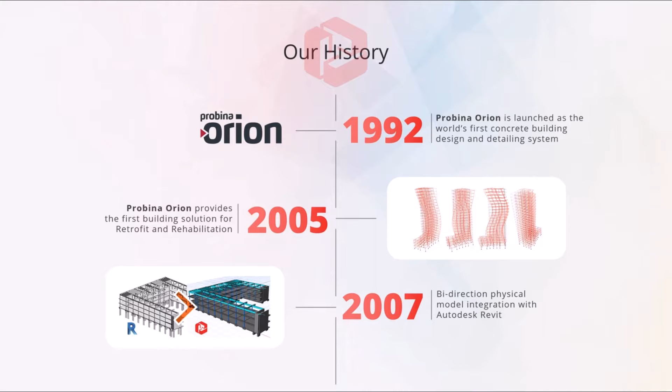We redeveloped the platform in 2014, and this is where ProtaStructure was born, and it's evolved tremendously over the 10 years since, and you're going to see a continued evolution in this presentation today.

Not to be outdone, we also have a very successful engineering team that's based in Istanbul, and they've been involved in some world's firsts. The largest international airport in the world was delivered in ProtaStructure using the technologies that were developed, together with a lot of the high-end seismic capabilities we have in the platform as well.

And as I mentioned, we're growing globally, so we're almost at 100 countries around the world. Almost, not quite—we just need a few more sales in some new countries, and we'll crack the 100.

So now, to do this, we invest significant time in the development of the platform, and that covers language support, detailed technical guides, a range of different international codes, and we also have a partner network that we support in delivering the technology locally to countries all over the world.

And we have a fantastic growing user base. It's really great to see the interaction that we get with our client base.

Now, what's the philosophy behind what we're doing? I think this is very important, just so you understand how we differentiate ourselves from others and what's important to us as a business. So obviously we look at what engineers are doing in practice and the type of solutions that they're using.

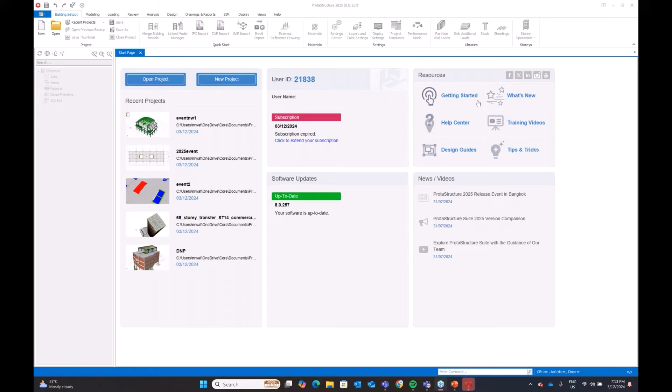Now I'm going to create a new project, and we're going to call this event 2025 NW. You'll notice there are a lot of templates here, you can grab a template, and these are customized to suit local requirements for the chosen code of practice. So if I choose, for example, a Eurocode template, it will load the local settings for that country. We've covered a range of different countries all over the world, whether you're in the US, the UK, my part of the world - Singapore, Malaysia, Thailand, or over in South America. We've customized the software to suit your specific local requirements, including language as well as local design and detailing practice. So if you're in India, for example, it will load the local Indian codes, all the local material databases, and the local way of design and detailing will be performed. This just saves you a lot of time with having to set this up.

So I'm going to design something today to Eurocode, and I'm just going to choose this. This won't affect the way in which you generally model in the software, that's all rather standardized. But I'm just moving straight into the modeling environment here.

So here you can see we've got a grid, and across the left we have our tree. This has evolved, so if you're an existing user you'll see we've added a few extra settings in here, things like sheetings and studs for composite and so on is all new. You'll see this ribbon's evolving as we develop it further.

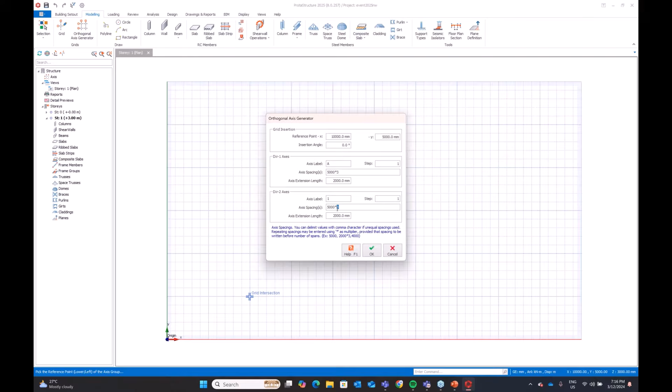Now, for the purposes of this presentation today, I'm going to create a simple model. I'm going to come in and draw out some axes, and create a fairly regular grid here. With this grid, I can take advantage of things like offset axes and so on to create extra intermediate grids. So I'll key in a grid line, take this grid and cut it down. We can do things like stretch the axes, so if you want to bring an axis in a little bit - maybe the bottom one here - I just want to stretch that up to a position.

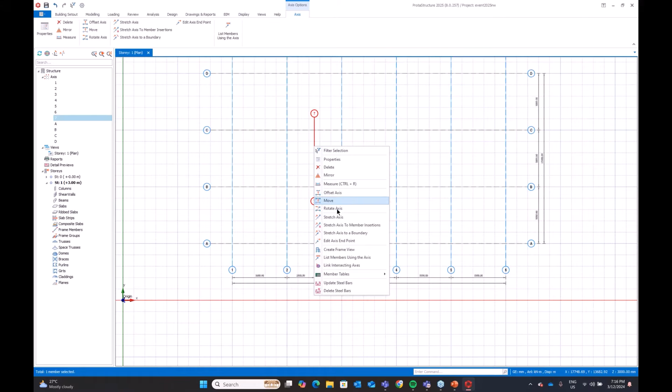Okay, maybe I'll just tidy that up a little bit at the top there. I like it to look good. Okay. Now these grids are all customizable, so if you don't want to see grids or you want to hide them, you can. They don't need to be present in the model, so I've just hidden that axis.

I can also take these grids and I can offset them. So if I wanted to create another grid, say 10 meters away, I can just type that in and I can create that. Now you can use the grids to help you with set out, so a little bit like sketch lines. And again, I can hide these and I can just use the grids as I'm doing here, just to sketch out positions that I may want to model to.

Okay, these can easily be done here. So I'm just here. You can see I'm taking advantage of the grid, the background grid as well with that set out. Okay. Now at this point, I'm going to use those to actually create some walls. So I'm going to use this to just model and create a core wall. So I'm just putting the properties in here, and you can see I'm just running around and setting out a core wall. Okay, and I'm using those axes just to help me define that.

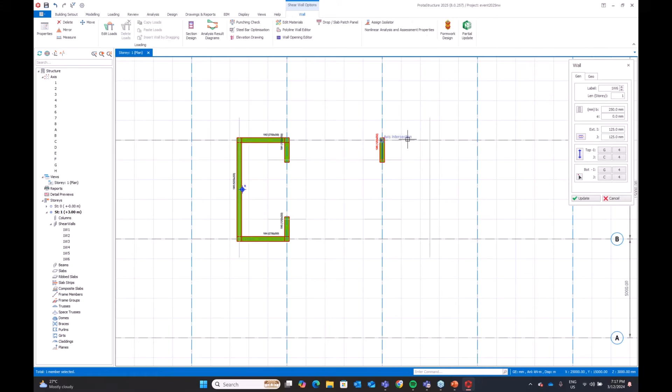So I'm putting a wall in at this location and just running around and setting that up as I'm doing here. Okay, so you can see that I've created a C sort of a channel shape core wall. You can have any type of core wall shape you like in here that can easily be defined.

The next thing I'd like to set up is some columns. So I'm just going to put in a regular arrangement of columns. Let's call these 450 square. Okay, we can box around to put them in quickly, and define them as I've done here. I'm just going to run around, create these around the periphery, and we can come and set those up.

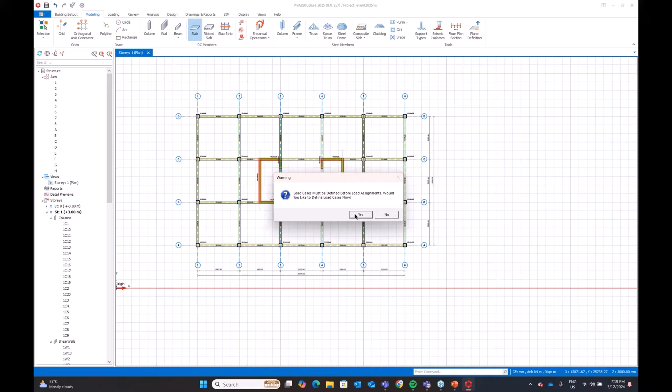Next step might be to provide some beams, and I'm just going to define and set up some RC beams. You can just give them some properties here. Now these can be quickly defined. If you have a regular arrangement, you can just box around and with a click create everything in one shot. Okay, now at this point, before we get into creating slabs, it will ask us to define our load combinations.

So we have a new load combination generator in the 2025 version, and it can guide you through the preparation of standard combinations in here. I can set up my dead and live load cases. I can set up a few permutations with things like pattern loading, stage construction, thermal cases, lateral cases like seismic can be set up here. You can, if you wish, model vertical seismic. This is something new that we've added.

Wind loading can be set up. You can assign notional loads to that, or you can leave it. You can generate separate combinations for steel as well as concrete. You can also add geometric imperfections for this. Maybe on the job you've also got a basement, you want to assign soil pressures. All these types of things can be easily defined and done in the model.

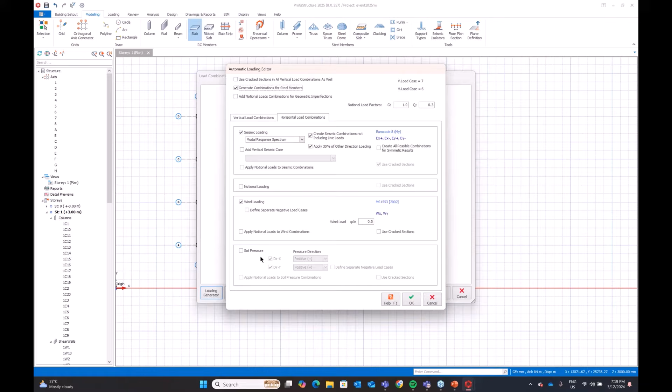Okay, so if I just accept that, you can see it's generated all these cases. Now you can add other load cases to this, so it's fully flexible. If you wanted to add a crane beam case or something like that, it's easy to come in here and set this up. So here I've got my concrete, my steel cases. We have also newly separated out the serviceability cases here. So you can have different serviceability checks for steel as well as concrete here. Okay, if you're happy with that, then you can accept this.

I'm now going to come in and define my slab. Now you can key in a thickness. Okay, I'm going to define some dead and live load. If you're not sure, there's tables here that you can refer to quickly establish them. So if it was say 2, for example. Now, if I click on the insert slabs automatically command, it will just place all those slabs automatically into that defined area. So they've just been quickly set up, and I'm just going to remove the slabs at the core walls there to make that clear and easy.

So what I've done at this stage is just create that first story level here. Okay, and you can visualize this. At the moment I've been working in plan, but what I've actually been doing is creating a 3D physical model, and you can see the beginning of the model that I'm about to build. Okay, so we can tile these, and you can quickly come and set these up.

Now what I'd like to do today is I'm going to work with some different structural systems from what we might typically work with. So I'm going to come and insert some stories. So let's assume that this building is 4 stories high.

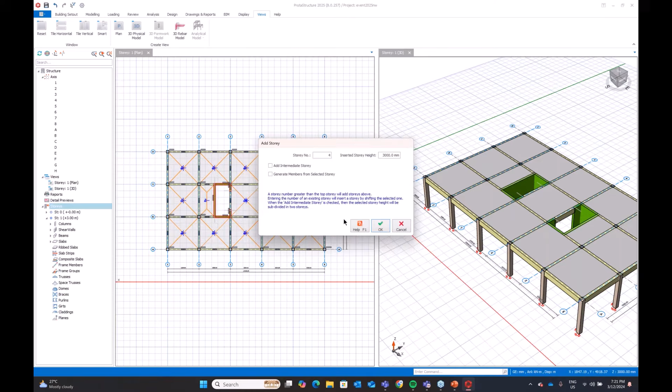And I'm going to take that first story and I'm going to generate some information up. Okay, so I'm going to take the first story and I'm going to copy it to the second, but I'm going to remove the beams. I don't want the beams at the second floor level there. In fact, what I want to do is adopt this as a flat slab. Okay, so if I hit OK, you'll see that we've now generated that up.

You'll notice that the slabs look like the beams are missing there. Okay, that can easily be resolved. So if we just hit move members to axes, okay, that will then remove those. And you can see that that's just regenerated as a flat panel. Okay, so we can come in here and establish this kind of arrangement.

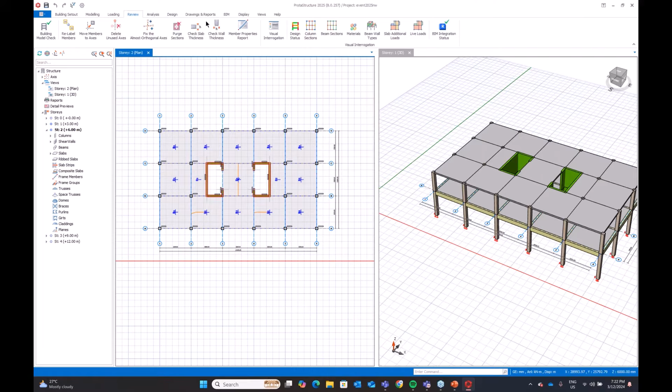What I'd also like to do is I'm going to just focus on the plan view for the time being. So let me just move into that. What I'm going to do at this point is come in and define another slab. Now I've put the slab in at this point as 200. I'm just going to quickly change this. Let's assume that the slab is going to be 250 thick.

Now, to do this, anytime in the software, you can select the elements, you can go down to slab table, you can easily come and define and make changes in here. So if I want to just quickly change the slab, a bit like in a tabular format, I can quickly change, and this could be other things, loadings and so on. Easily you can come in and make changes. So I've increased the thickness here to 250.

I'm also going to want to create another type of slab. I'm going to assume that I've got a cantilever to it. Okay, I can define the thickness again. Loading again, we can just put this in. It'll be 1 and 2, but I've got a cantilever, so I'm going to assume that this is going to cantilever out a bit. And I also want to have a parapet load, so I could define a small parapet around the edge of that. It could be a balcony, railing, or something like this.

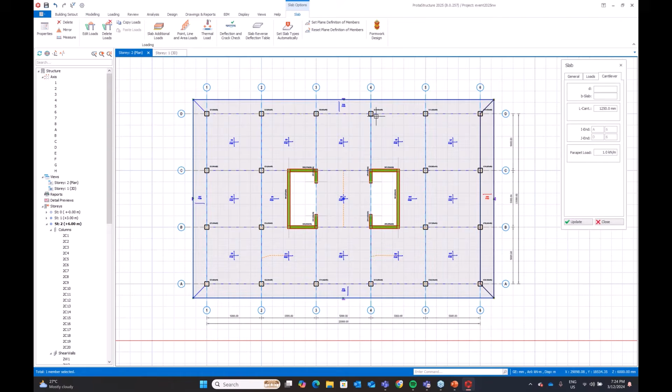Okay, and to define this, I can just click between margins. Notice how it's asking me which side I want the slab on, so I can just click and create that. Okay, so I'm just running around coding that at the edge there. Let's run around and put this one in as well. Okay, and finally this final side. You'll notice that it's joined at the corners there, to create this panel.

Similarly, if you select all the elements, you can just easily come and filter. So if I just filter the selection, maybe I just want to see the columns, and I'm just going to select the columns only, and you'll see that they've now been highlighted. Now at this point, I'm going to come into the column and I'm going to insert a new function here called drop or slab patch panel. Now when I select this, it will then allow me to define a drop head panel.

If I hit OK, you can see that straight away we've set those up, and they've been established in the model. You can do the same thickenings around the core wall. I won't do it for this example, but those can be done as well. So here you can see that I've set those drop head panels up.

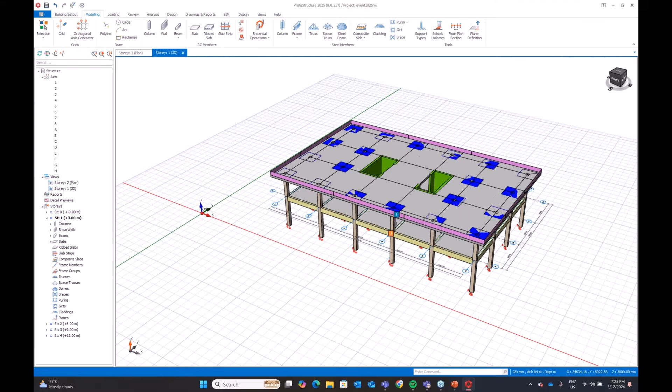Okay, together with the drop head panels, together with the patch zones. Okay. Now, if I just go back to the plan, what we would want to do with designing the slab is we want to set up strips to allow us to integrate across strip widths. And you can see here, I'm going to define some slab strips.

I'm going to choose the direction I want the strip in. I'm going to go for a finite element strip, and I'm going to use an integral strip. Now, I'm going to draw the results from the building analysis, but you could choose just to do a subframe analysis. It could just be a FE Floor analysis in here, and you can also define the width over which you want to integrate.

Okay, so I'm now going to define these strips, and I can just draw through the slab here. You can see that I'm just coming in and defining the zones over which I want to create these strips. You could just easily put these in, and you can define where you want these strips. So these are, I guess you'd call them mid-band strips. I can cut strips in the other direction as well. So if we just come up, I'm just creating them in the Y now, and we can just carry on and draw these through.

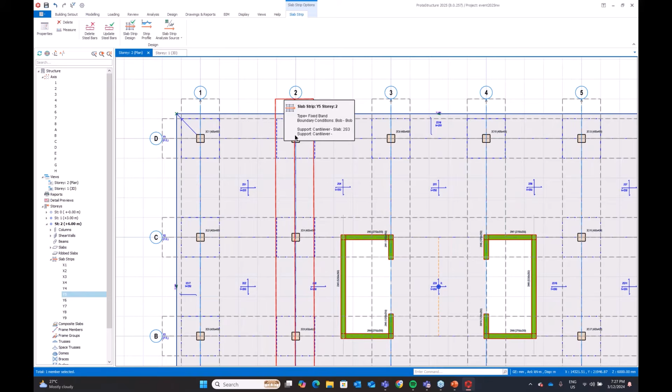Okay, another one there. Another one maybe here. And we can carry on and just draw these through. So when we run the analysis, we're going to mesh this floor, and it will then collect the forces along these zones for the design. So the patches we've created, and I think I've just made one that's not quite what I would like. I can just go back and reposition that. Let's just get that orthogonal.

What we're doing is that I have a strip here, and if I was looking along this strip, I've got a patch here, I've got a mid-band, I've got a patch, I've got a mid-band, I've got a patch again, I've got a small band, I've got a final patch. So we're going to cut a FE strip along this, it'll integrate along those strips, and then it will design the steel, it'll average across those widths and design the steel in those zones.

Okay, now you can set up other strips, intermediate strips as well. So if I wanted to define another strip, and it could be a strip along this mid-band zone, you can come and choose this, and you'll notice here that the width here is editable, so you can choose the width over which you want the strip to integrate. So I've extended that width across this width here.

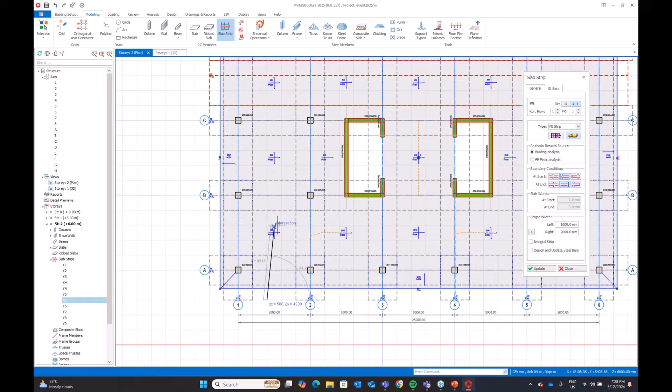And I could at the same time cut the same strip in the other direction. So let's assume that we are cutting a strip here as well. And I could carry on. I could break this all into strips for the whole slab. But I'm just going to give you an idea of how that's set up and how you can go about using this. And later on, it'll collect all those forces, and then it'll automatically design the slab for you.

Okay. Now, as part of this process, you may also want to just look at the loading, and the software will predefine different pattern load variations for the slab. So when I set up the pattern loading, you can see that it's defined a series of different permutations here. Now you can manipulate these if you wish. So if you didn't like this permutation, you could turn this panel on and off.

You can just come around and manipulate this to suit the different permutations that you would like to see. So if you wanted to have, I don't know, something like that, you can set up a checkerboard of different type of loading that you would want to see in the slab. So this can be up to you, and you can set up these different permutations. There can be really an infinite number of different permutations that you could establish here, but this will then cover the range of expected loading that you would expect on the flat slab.

So the pattern loading will then resolve it into envelopes that we will then use for design for the slab system. So this is a nice, easy way to see that visually. And of course, as I mentioned, you can work with this to manipulate it to suit what it is that you want to see. Okay, and you can create multiple different ones. You can add to these if you wish, and set up all these different cases. So it's a nice way to visualize that.

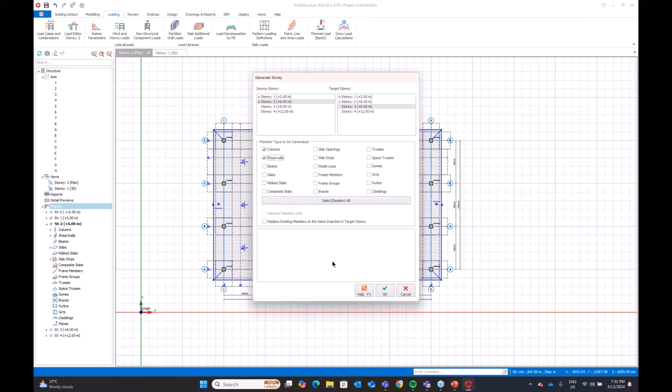When I do that, you'll notice that it's also taken the column heads. Again, I could just filter these out. Let's just quickly isolate those, and then if I come back in, I can turn off the drop head panels so they can just be removed. Okay, and I've just got my columns left. So if you look at this in 3D, you can see what I've done here. I've just extended those columns up.

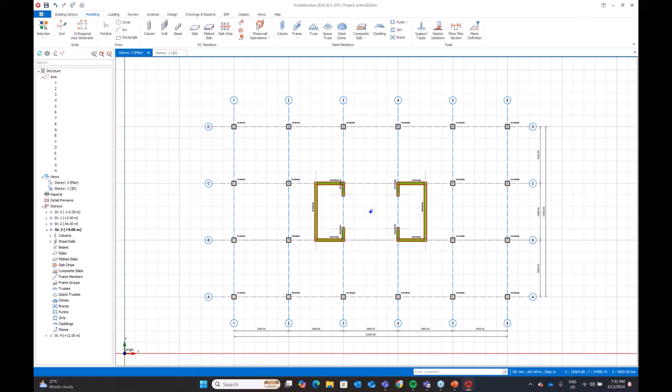If I go back to this plan, this time round I want to model something a little bit different. This time round I'm going to create a composite system. To do that, if you come to the steel menu, you'll see that there's now this new option to create frames. The frame members cover a range of different uses. It could be just general steel members, it could be purlins and girts and bracing, but we also have this new frame element as well, frame group element, which I'll get to.

Now I'm going to create a primary composite beam. So this is new. You can just select this option, and in here you can choose from different databases for a section. So I might want to use a UK section. I can look at the sections and choose something that I think is appropriate. For this, let's use a 45 kilogram per metre section, a British section. I can accept that.

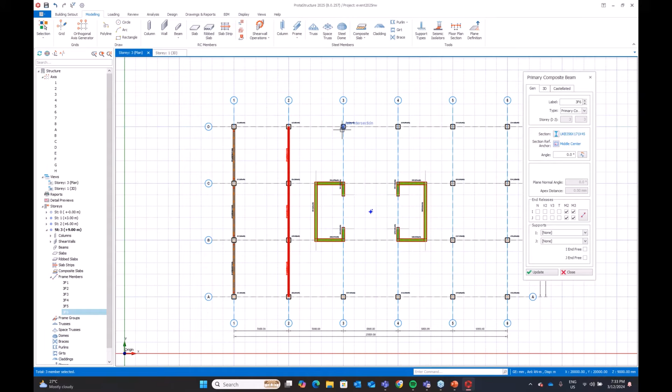Now you can play with the fixities, so primary beams can either be continuous or they can be pinned. So it's up to you. Typically with composite, you're wanting to pin things. You don't want onerous connections, so we're going to just pin these, and again you can just box around to create those members, like I'm doing here. I'm just creating those primary members along the beams. You can of course snap to points, which I'm doing.

Let's come down here. Maybe I'll do the same thing here. I'm just going to model that. Because I've got these walls here with the flanges on them, I want to make sure the connections there are made properly. And then again we can just put in our primary members here as well. So you can see quickly I've established some primary elements.

Now at this point I'm going to take these primary beams and add my secondary members. I want to do this quickly, so to do that I'm going to choose this option called frame group. In the frame group I can choose another section. So again, this would be a secondary composite beam. You can choose the nature of the item that you're modelling here, but I'm going to use a secondary composite beam. I can choose the number of members I want to have in here, and where I'd like these placed. So I'm going to position them between these two members: the first member there, second, third, and so on.

I'm just going to model these across here. Let me just go back and load the properties. I'm choosing the members there, and you can see that we're quickly placing these across the model. I'm just choosing elements that I'd like them to span between, and they're getting created. So quite quickly I can set these out. I'm just running around and placing these members. That bottom one there, I'll come back to it in a minute.

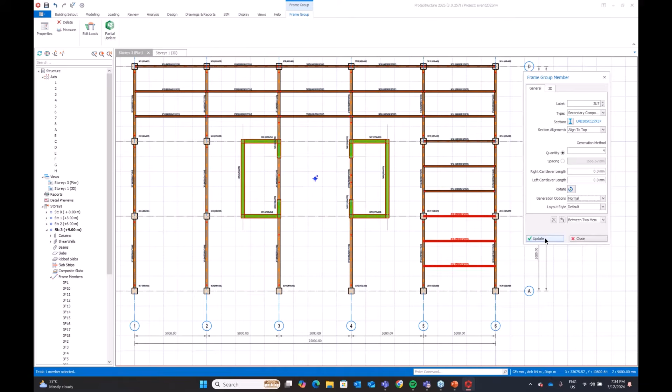Let's change that now, so I can just normal and update, and you can see that that extra member's been added there. And I guess that will be the same for this one as well, and probably the same for this one also. So quickly we can set these out. Now let's finish this off. So do the first member again and go back and just finish these. Here I'm going to do it in reverse, so I'm going to delete the last member and just place these ones here.

So very quickly you can see that I'm able to frame this floor out just by taking advantage of this. Now you'll see I've got some areas that I haven't yet created here. So I'm just going to go back and finish this, and I can just come in and create the secondary beams myself. So again, I'll just choose the same section. Okay, let's do that, and I can just model these in myself.

So I can click and create. Okay, we've got some really comprehensive copy commands in the new Steelwork as well. So if you want to quickly copy things and paste them, you can do that as well. Okay, I'm just going to quickly run around and add these extra members in.

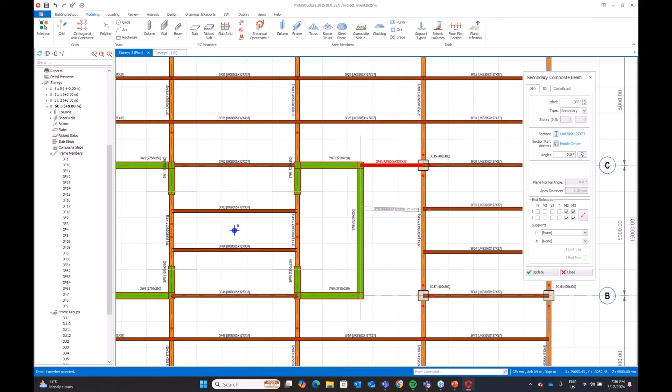Okay, so you can be as accurate as you wish here. I'm just running around and creating what I would think to be a sensible arrangement. Okay, oops, I think I've gone too far with that member. I think I missed a snap point there. Let's just come and create that. Okay, so just finish this off.

All right, so I've created an arrangement here that is at this point just a frame. So if you come to the 3D view, you'll just see that that's a frame. I'm going to go back to the main view, and what I want to do now is define a composite deck. So to do this, we will select 2 points, and I'm going to select these points here, and it will then prepare and preview what the composite deck might look like.

Now there are different types of decking arrangements here, so you can have the deck flush with the top of the flange, or you can have it sitting above the flange, which I guess is what most systems will be like. So you'll see when it does this, it's automatically looking at the effective widths and calculating them. But you will now have to go through and define a series of inputs for the design.

So you'll define a fabric, you'll put in the depth of the slab. You'll also define a construction stage, and we will run the construction stage as part of the analysis. You can put in the dead load. You can also put in a live load here. So you can just define these in here. Now, the last thing you're going to look at is maybe the decking system. So we've got a range of different decking profiles here that you can choose from.

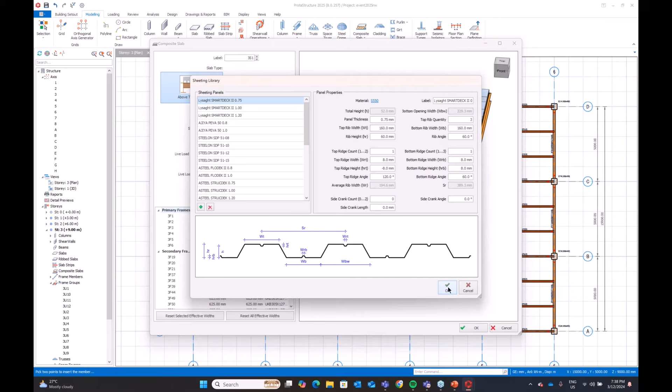Lots of different decking profiles. You've got reentrant corners, trapezoidal decks. You've got a range of different ones. Bondek is something they use in Asia and in Australia and New Zealand. But you can just come and choose your preferred decking profile, and you can play with the parameters here, and you can accept that. Okay, now that's been set up.

Now at the moment you'll see that this is spanning this way, and I want this to span the other way. I'm just going to flick this 90 degrees and have that span in this direction. So if I'm happy with this layout, I can just accept that, and then that gets created. And for the rest of the deck, I want them to be similar. So I'm just going to run around and create this, and you'll see it's creating the effective widths. It's remembered what we've created before, and it's keeping what we had.

Okay, and we are just going to run around and set this up. So let's do that whole central panel as one. Again you can see it's just calculated the effective widths, and then we can accept these. Let's come around and do that. Okay, I think I've missed one beam there. I might have to come back and put that in. Let's grab that beam there, properties, and just put that in. Okay, that's set up, and the properties.

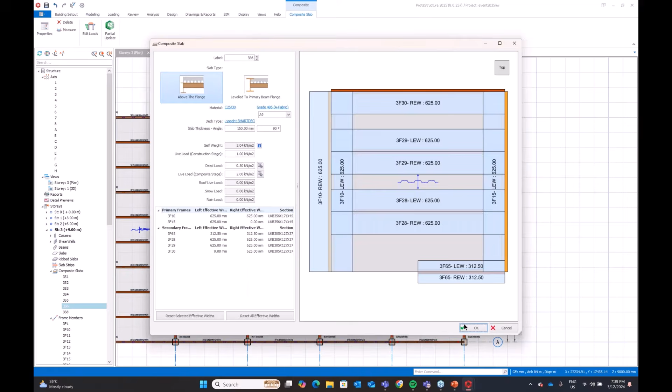Just for the purposes of making sure I'm right, I'm going to delete that, and then we're just going to go back and reinsert it. So let's just go back and do this again. Okay, so you can see that I've done that. That's correct now. And then we can just run around and finish that. Okay, so very quickly you can see I've come and defined the deck.

And we've put the slab in. Now, if you look at the 3D view, you'll notice that we've actually dropped the beam. So the slab is now at what we would call top of steel, or at that floor level, and we've automatically adjusted the beams downwards against what you would want as your slab finish level.

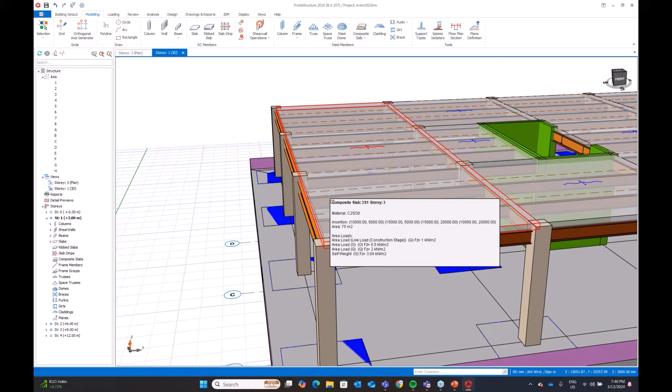Okay, so you can see that quickly we've been able to create that. That didn't take very long.

Now the final bit I'm going to show you today in terms of modelling is I'm going to go up to the roof. Let's grab the stories, and assume we're at the 3rd floor, and I'm going to generate story to the 4th. This time round, I just want to grab some columns.

I'm just going to copy these up, and we can hit OK, and then you can see that those columns have been extended up. Now I could selectively choose what I want to copy, which probably would have been faster, but you can also come and edit these and remove elements if you don't want to see them. Whoops, sorry, I didn't want to take those out. Let me provide those back.

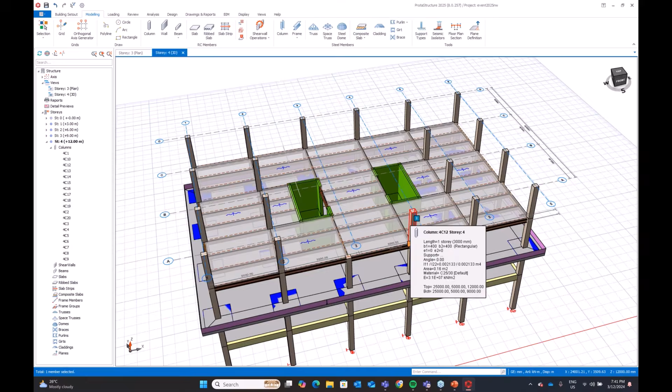So let's assume that we've got some of these columns here, something like this. Now I'll remove those ones on the other side as well. I'm going to at this stage work in plan as well, so let me just do that.

I'm just going to select these columns here, and go to the member table, then the column table, and extend the columns up. I'm going to change the DZ top and make this 3 meters. So we can type in a DZ top, and if I hit close, you'll see that I've now extended those columns up a floor.

Now I'd like to at this point come and create some trusses. To do that I can just define a truss, and choose points where I would like the truss to span between. I'm going to drop the depth of this truss maybe to 1,000.

We can put in the number of bays, let's just assume it's 3, or maybe we can make it 4, it might be slightly better. Now you'll notice here that there's a little preview, and we've got a range of different trusses in here. You can import from CAD, or define them with nodes and so on as you would in, say, STAAD. I'm going to assign this to the top chord, so you can see it's removed the verticals there.

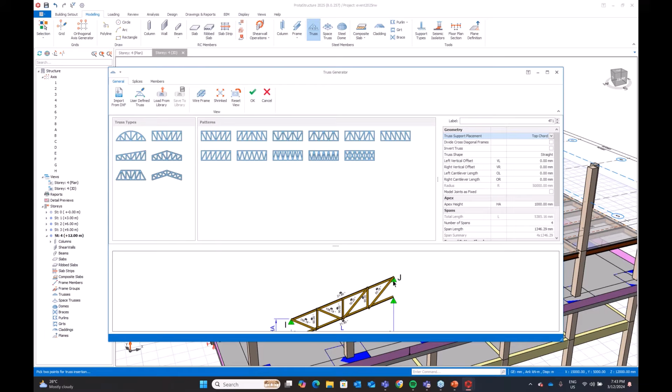You can play with splice positions, and you can also play with fixities. I might want to pin all the internals in the truss, which I can do here. You can also introduce axial releases, torsional releases, and so on, so you have full control over all the fixities here. And if you're happy with this, you can just accept that, and that truss gets created.

But what it's also done is remembered this, and I can copy this, and we can replicate it to other elements. So you can just choose to quickly come and create and move those across to the other side. Now I can do the same thing at the other angle. Let's come in and create that truss. It's remembered what we had, so I can just accept that, and again I can copy that, and we can choose to replicate that across.

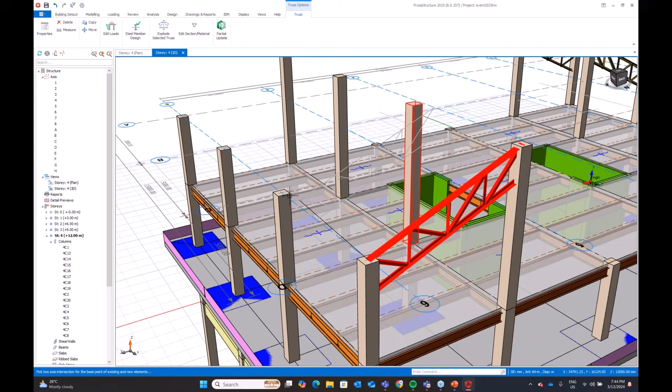Oops, let me do that a bit ahead of myself, I'll just copy that one more time, to show you how to do this. So it's just the copy command, and we've advanced these a lot with recent releases, so the steel is now extremely flexible when it comes to copying and creating. So I've just come and created some edge trusses there. This could be a hall or an auditorium, something like that. You can come and define this.

What I may also like to do is just come and set up some purlins. So I'm going to choose a couple of members at the ends there, and we can define an arrangement. You can see a purlin arrangement here, you may be happy with this. You can put in sag rods and so on as well, but if you're happy with this, if you just accept it, then the purlins will get created.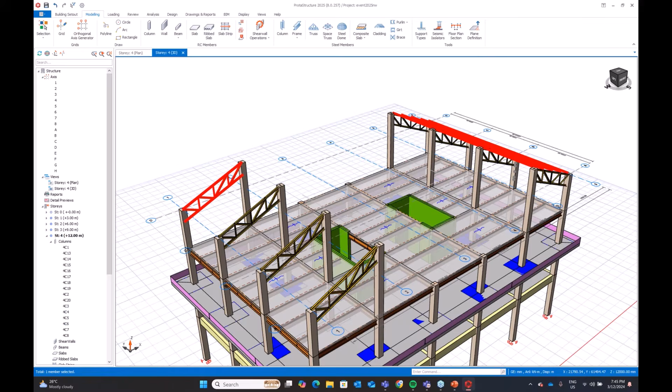And I can repeat that on the other side, so we just choose those 2 end bays. It's previewing a purlin arrangement, and you can manipulate this if you wish. Then they get set up and created.

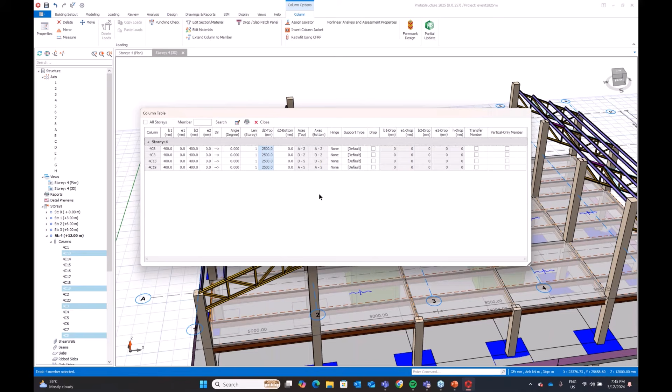Okay, so I've just come and defined those. Now I'm going to come to the end columns here and choose these end ones. If I go back to the tables, this is where you can manipulate things to suit what you want. I'm going to change the delta top now and increase this by another 500, so let's make it 2.5. I'll hit OK, and you can see we've made the connection here, but I've extended this up further. You can do things like this as you go about creating the model.

What I'd like to do at this point is show you a new feature, which is space trusses. I can choose the space truss feature and define it by a series of points. I'll do this in plan, choosing the points to set out the space truss. Now we have what we call a space truss generator, and you can manipulate this to suit what it is that you want to show.

I'm going to show a slightly curved truss. I can key in parameters here, so I might make the radius of this a bit different, and you can play with this. You can choose the number of bays that you want to have - let's go with 6. I've got a bit of an offset which I'm going to use, and if we hit generate, you'll see that it will create a profile here. Of course you can manipulate this to suit the geometry.

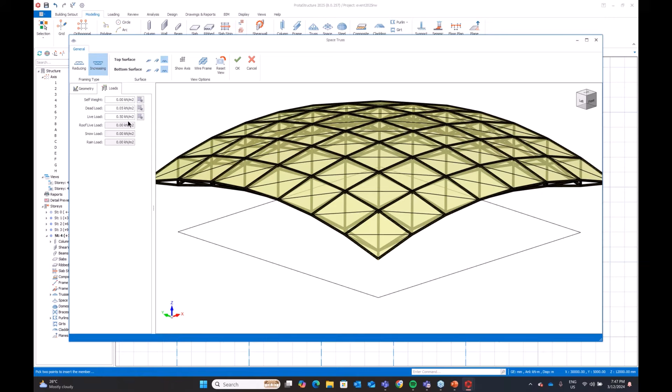You can also at this point come in and add loads to this. So very quickly, whether you're defining a space truss like this or a roof panel, you can quickly come and define these loads now. So if I had some additional superimposed dead load, as well as some live load, maybe that's 0.5 or something, these can be set up. Now if I hit OK, this will be established in the model, and let me show you that in 3D so you can see I've got quite a nice truss that we've set up in the model.

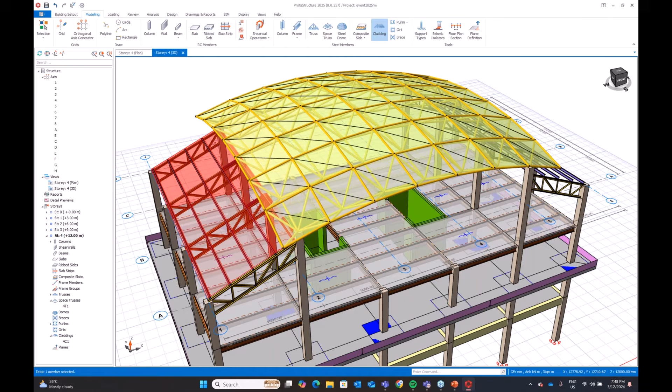You can use cladding as well for things like the purlins and walls where you may have defined these. So if I click on those purlins, you can see that's a cladding plane as well, and we can come and set these values. So you can put dead load and live load as well, and that will be set up and assigned to that plane. So very quickly you can come in and load these up - it's a nice way to define those very quickly. Okay, so again you can do this in here - 5 and maybe that's 0.5, something like this - so they get that set up.

So we've got a model that's a little bit different, for sure, and we've got a funny space truss roof with some trusses. We've got a composite deck here with a composite system. I've shown you how you can go about creating a flat slab with drop head panels, and we've also got a sort of a conventional part of this as well. I'm going to do a couple more things, and then I'm going to get into the analysis and design.

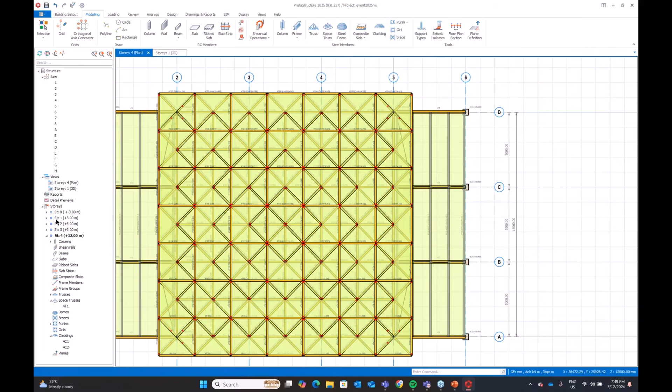I'm just at this stage going to drop down to the first floor. I'm going to take these panels and drop the walls - I can just select them all, or filter them, like I'm doing. If I go to the tables here, to the wall table, I'm going to drop the delta Z, and we can do this on both sides. Let's just assume this is a meter down, and I'm going to do the other side as well, so let's make sure we don't have sloping walls.

So let's just drop these down as well - I'm going to drop these a meter. This could be you defining something like a lift pit, and you can just come in and set these up. So if I look at the 3D view now, you should see that the walls have now dropped below what would be the typical foundation level.

Now, if I go back to the plan view, I can delete the slab and this beam for the time being, and take this wall, okay, and I'm going to model another wall in. Let's just do that, and you'll see what I'm going to do in a minute.

What I want to do is provide a wall down the bottom there as well. Let's just assume the wall spans between these two points, and I'm going to drop this too. So we're going to the delta top. We're going to take this as minus 3.6, and I'm going to do the same with this - minus 3.6.

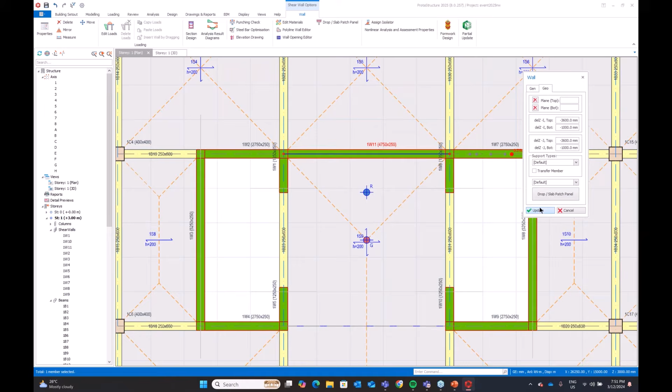So what we should see now, if I come to this here, is that I've brought that wall down to that bottom level there. Now of course we can take the properties of this, and we can replicate it over here, so I can just come in and model that as well, and we've created that.

But what I also wanted to show is that we've now got a sort of lift pit with some walls down there that we've defined. Now back at this level, I can come back and take the properties of this member, and just model a beam directly on top of this. I've put a member in there that will support that slab at the higher level. So you can see now that we've got the slab up here, and then we've got the walls at a lower level there - that's just one way you could approach a model like this.

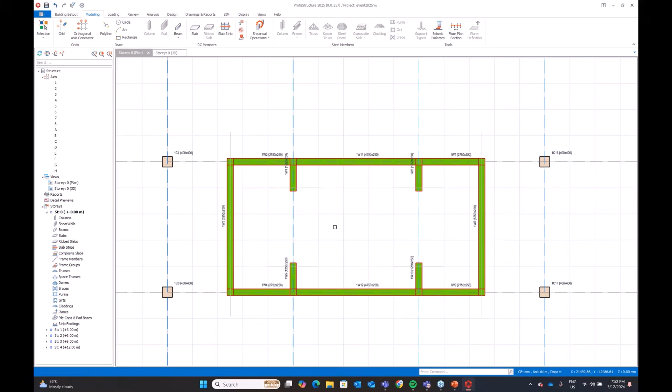Now I'm going to come down to the foundations. Let me come down to the foundation level, so we can see that this has now been set at this level. And when I want to define a slab, this could be a raft, and you can define the thickness of this in here. Of course you can add additional loads.

And I'm going to apply a delta Z - we want that raft to drop, I think it should be something like 650. I'm going to insert the raft by a beam region or an axis region, so you can choose how you'd like to do this. Let's just assume we've got something like that there, so what I'm doing is just positioning that slab.

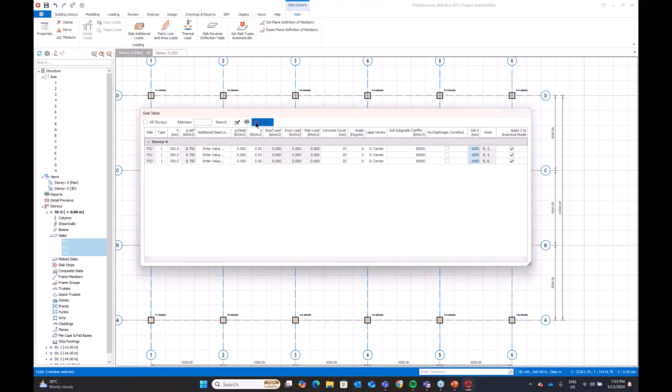In fact, I've got to drop that a bit further, so I haven't quite got that right. Let's go back and change those. I think that delta Z is probably going to be what I originally thought, which was a meter. It's easy just to edit - if you want to, you can globally change things in here, and let's just make that minus a meter, and then we should be set. So I've just put it in at the lower level.

We could, of course, maybe have a step foundation here, and we've got another part of the raft above. Again, we could come and define that in here as well, so I could choose to put another slab in here - maybe like a cantilever. Let's just assume it's a meter, and then we could run around the edge here and define this.

So today I'm just doing something a little bit different - I just wanted to give you an idea. You can see here I've created something like this at the base, so I'm doing something a little unusual; I just wanted to show you some of the new functionality in the release. We've got a lift pit here with a foundation that's stepping, our conventional beam slab system, a flat slab, a composite, and then my roof and so on.

So at this point, I could come in and assign other loads - we can come and set up things like the seismic parameters. I can come and define different spectral curves; there's a range of different seismic codes that we support wherever you are in the world. This one happens to be for Malaysia, so there's seismic maps here that you can choose from.

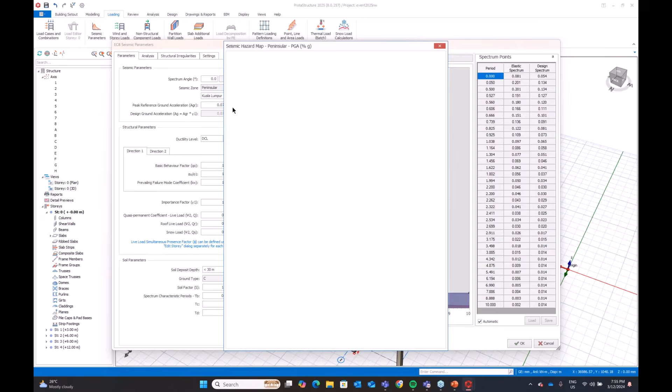Okay, and different ground types and so on. When you choose these, they will adapt to suit. Of course, you can key your own values in here. You can put in the number of modes that you wish to run. You can also define different structural regularity checks you'd like to run.

If you wish to, or you're in a high seismic zone where you have to do strong column weak beam or joint shear checks, these can all be performed as well. And then you can just assign this to the model and that's set up.

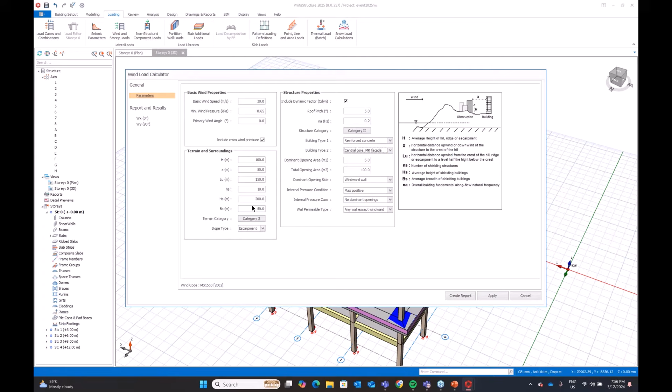Similarly with wind loading, again, we will generate wind loads. You can define basic wind speeds. You can put in different topographical terrain factors to help generate the wind loading. You can choose the nature of the building and what type of thing it is, and then we will calculate all the pressures and crosswinds and so on, and they will be assigned to the model.

So just with a few clicks, you can set up and assign different types of loading, wind loading and the like. They can easily be established in here.

I'll just see if I can touch on... no, I'll come back to it.

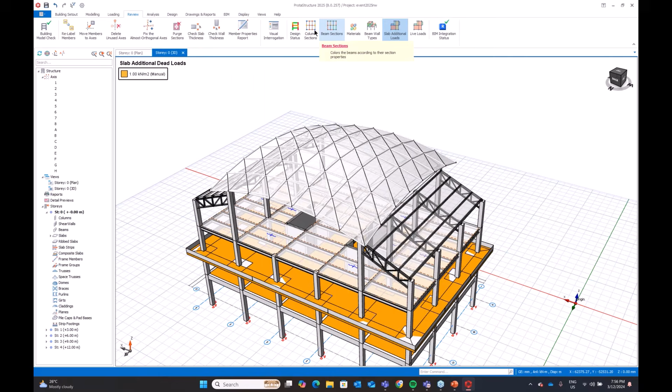So this gives you an idea. Now, at this point, I can check the model. You can check things like the live loads that you've assigned, maybe the superimposed dead loads, what column sections I have employed in the model, what beam sizes I've got. All of this is color coded, so it's easy for you to check before you get to the analysis and the design.

So the analysis is a button. What I'm going to do today, just in the interest of time, is shoot to a model where I've already run it. This is exactly the same model. I'm just going to open this up. I just want to save a few minutes on running it, and then I'll take you through the results.

So the same model that we've just created, and you can see what we've been doing here. Now, I've run the analysis, and at the same time I've done the design. So you can see the design status. You can see that a lot of this has passed. And you can see here that we've done a number of things. We've designed the flat slab, and I'll come to this in a minute.

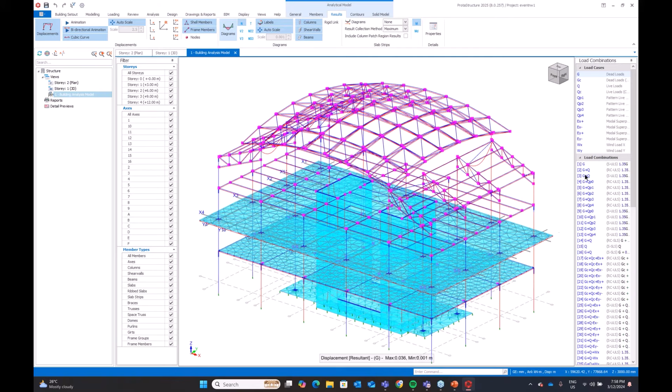We can see the full 3D results. We can come in and interrogate the model, the analytical results. So I'm going to just open up the analysis post-processor. Obviously this is all integral, and you can come and review the results in here. Perhaps you're interested in looking at axial load for a particular combination. You can see those results here, and how they've been set up.

You can review behaviours, seismic behaviours, and so on. You can see how the building's behaving under various excitation there, and in the different directions. Probably not the most stable structure in the world, but you get the idea.

We can move to look at other things. If I wanted to look at some stresses in the structure, we can look at contours in the model, and different stress contours. What I will do is focus in on the flat slab, since we were looking at that just now. So that's level 2 there, and we can just choose to look at contours.

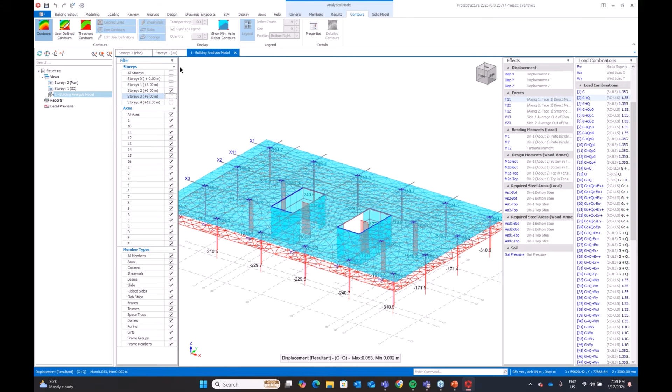For those of you familiar, you'll notice that we've now got shear contours in here as well. So you can quickly review things like the shear contours. You can see axial stresses and so on, which are more pertinent to the walls. And you can see all the bending moments here as well.

We will resolve bending in X and Y. We'll also calculate the Wood-Armer moments, and these will be resolved into design moments. You can see these top and bottom in the different directions. These can also be represented in terms of area of steel contours, so you can get a feel at this stage for what steel you may require.

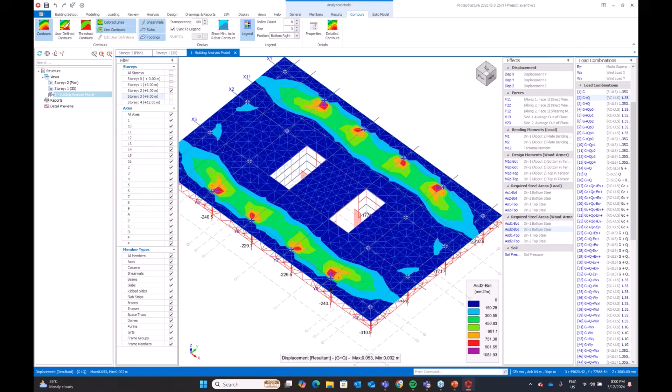Now you'll recall that I cut strips through the model here. If you click on these strips, you can see that we're creating points across which we are integrating. If I select the strip and right-click, you can see the strip profile. We're hiding the patches, so I'm just going to include the patches as well, so you can see the entire strip.

So we will integrate across these strips, and there are obviously various envelopes that we're creating; all the pattern loading and so on is being run. But you can see the design envelope that we're using for designing this.

So that's another way that you can just come and interrogate the results and make sure that you're happy with what's going on. When I ran the analysis, and if I just show the whole building again, you'll notice that I also integrated the foundations, and these have also been integrated even though we've dropped the slab panel. So you can see that we've created an analytical model that represents that.

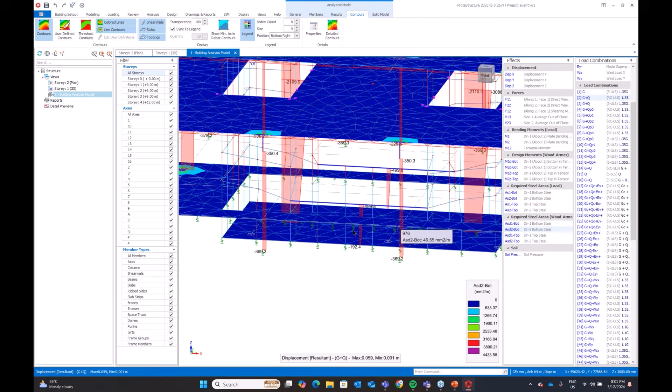I didn't show you, but you can also define soil pressure loads and so on against those elements if you wish to. That's all part of the loading side of it, but you can see there that we've just built this complete model here. Okay, so let's just delve in a little bit more into the model itself.

So we've designed, I'll just turn off the analysis model for a minute. So we've designed a number of different elements in here, and to access these, we can come to the design. So all the elements that we've modeled are all accessible in terms of design in the menu here. I'm going to go to composite design. You can see that these have all passed. And if you want to dig down into a member in more detail, you can just select that member, and you can have a look at this more closely.

So you can see that we've laid out the stud arrangement there, and there's been a number of different checks that we've performed. So this is just a very brief summary of the checks. So things like shear, longitudinal shear, camber, shear buckling. You've got serviceability checks in terms of deflections as well as vibrations. All these will be checked.

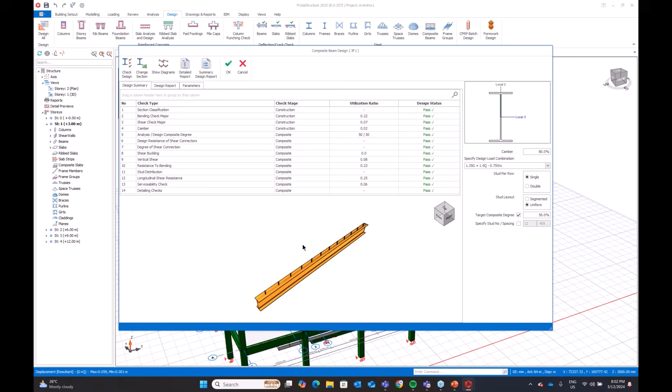So you can see just a preview of that here, but what we also will do is provide you with detailed design reports. So you'll see that in this release, there's comprehensive documentation now of all the designs. So if I select, say, a composite beam, you can see in detail all the various checks that we're performing. And you can see there were various headings here, so you can look at different parts of the checks.

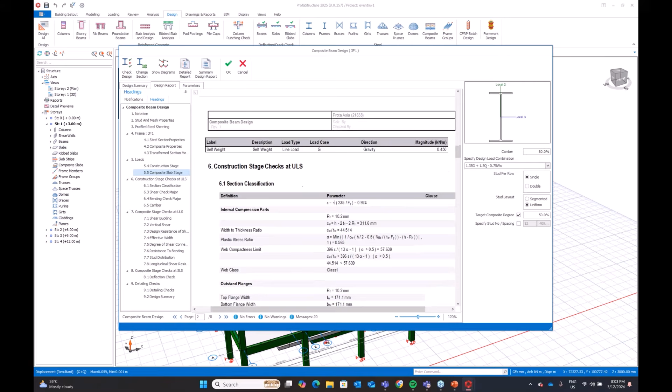So for composite, there's a construction stage that we will need to run, as well as a final composite stage. So we're running these analyses simultaneously. As it runs the analysis, it's running both cases simultaneously, and you can see the various checks that we're performing for this. We'll also be checking for shear, longitudinal shear and so on, bending, camber checks.

So various checks, and you can see all the detail against the code, step-by-step calculations here. You've got some final deflection checks, as well as general checks as well. There are also checks being performed for vibrations and so on as well. That'll be part of those checks that we do. So that just gives you an idea of the composite design.

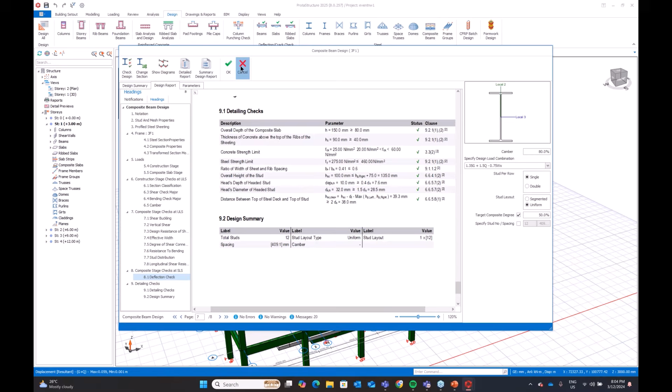If we would like to look back at the flat slab, you can see that these have been designed, and if we go to the slab design, these are automatically designed as part of this. You can click on an item here, and we will open it out. So you can see the main strip, and we've laid out longitudinal bars along the main strip, but for each of the head zones, we need additional steel.

I probably haven't provided the best example here, but there'll be additional patch steel required across those column patches, and you can see this in here. So you can just review these, you can see where we've got additional steel required. And there's detailed checks that we're performing that you can see in more detail.

There are reports, so these will be summarized as a report, and you can just get a very brief summary, or you can look at it in detail. And you can also examine the strip profile like I was doing earlier here also. Now in addition to these checks, you'll also want to be checking for things like punching checks.

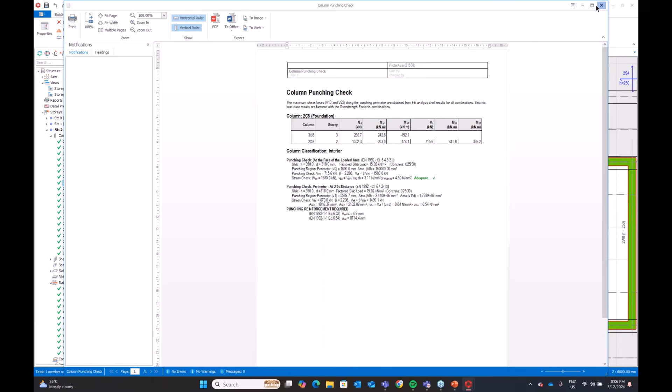So if I choose the columns here, let me just grab a column. You can run your punching checks. We will know what's in that vicinity, and it will do the check. So it's checking this to Eurocode, but if you're using say the US codes or perhaps the Indian standards, there'll be detailed checks performed to satisfy the code here, and they'll all be documented as well. Now that includes the pattern loading.

Of course, when you run the flat slab, if you're doing a subframe or part of the building analysis, you can make adjustments for creep and shrinkage. We also have, in this version, deflection checks as well for slabs. You can cut additional FE strips through this, and you can perform very detailed, rigorous deflection checks of these, looking at creep and shrinkage over time.

Okay, so you can set up limits, and we will check it to the code. So you can see those checks in there. They're quite useful, and they also can be used for beams as well. So if you're looking at long term, maybe you're worried about displacement. It could be part of the structure that you don't wish to have excessive deformations. You can just use this to check, and there'll be quite rigorous checks by first principles.

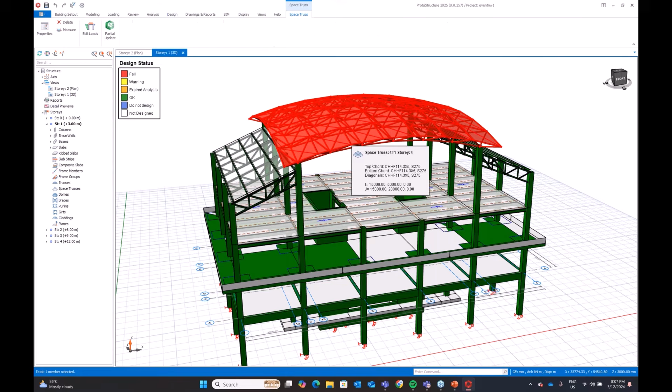Now, let me go back to the model again. So we've also done the steel checks, and again you can click on the steel member design for, say, the roof here, and you can see for our space truss the checks. You can see detailed checks for the different elements, and you can drill down into these. Now we can provide detailed reports, and again you can see very, very detailed checks against the code with step-by-step documentation for each of the elements.

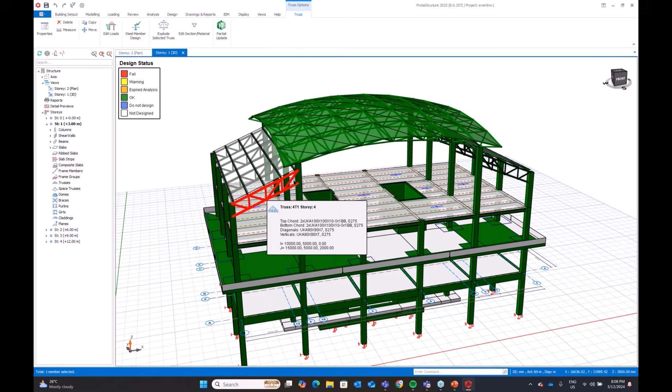So whether it's a space truss like this, or just general trusses like over here, again you can access these detailed reports in the software, and you can see all the documentation behind it. You can come in here and manipulate these if you want to change things to get the design to pass. Perhaps you haven't modeled all the purlins and you want to manually edit the buckling parameters, you can do that as well. All of this is at your fingertips. You can just come in and tweak things to suit your engineering assumptions.

If we go to the general design, all the columns and walls here have been designed, and you can click on a column or wall. In this particular model, I'd merged the walls, so you can see that these are now being designed as one element, and we will collect the forces as one singular element and design this, and you can see we will calculate the neutral axis of the core wall there and design it accordingly. You can also see detailed interaction diagrams.

I'll probably show that best with a model. We're also, even at this point, starting to look at how this would be drawn out. So you can get a feel for how that wall is going to be drawn out with the end zones and so on, just with a click. And you can start to get a feel for how this is going to be ultimately designed and presented.

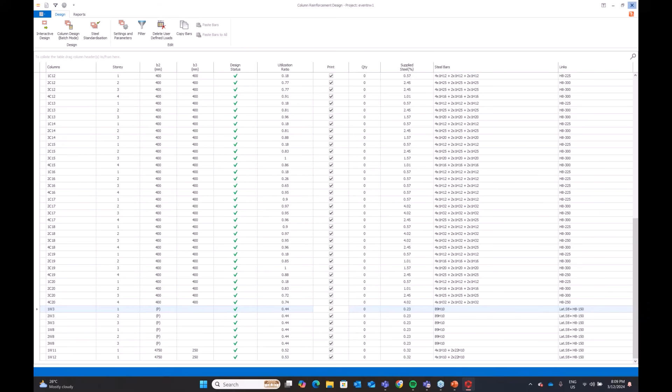So the columns, similarly with the beams, the beams are all designed there. You can group beams, so we will automatically group similar axes, and it will find those members that are similar. So these have been grouped, and then if you click on a particular beam, you can look at the results in more detail. Let me just grab a beam. You can also interact with the model here, so you can come in and have a look at this in more detail.

So here's a schematic of the beam, and you can see the rebar on this. At any stage you can make changes. When I drop the steel there, you see that this is not adequate, so this is interactive, but we're trying to optimize the rebar for you. We have detailed reports here also, so you can see step-by-step design calculations for all the concrete beam elements here, so you can see exactly how we've come up with the design.

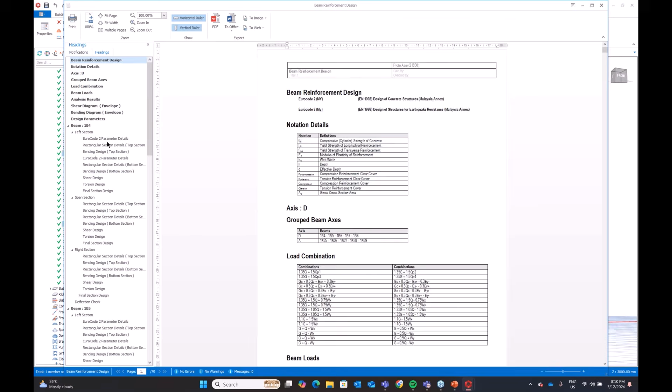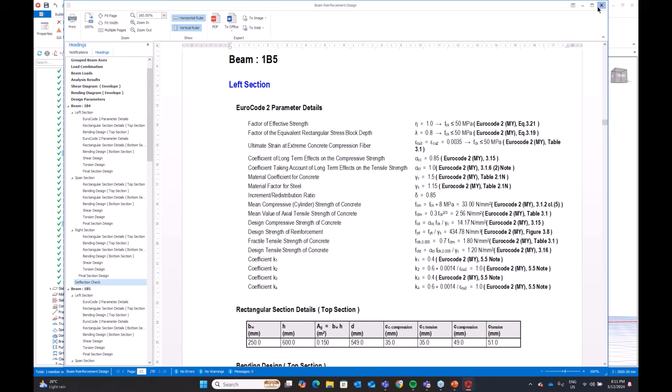We're not leaving anything to chance, so if you want to drill in and look at a lot of the detail around the code, we're checking for things like shear and torsion. Detailed deflection checks are being performed as well. So you can see the documentation for all of those here, if this is the level of detail that you want. Of course, most of the time you might just want a brief summary, and you can get a summary report there as well.

Okay, so I've covered a bit of the design there, so you can understand how this is being designed. At this point, I might want to just come back down to the foundations again. We have obviously modelled the foundation in this vicinity. But what I'd like to do at this point is go to the perimeter columns, and I'm just going to select these. If we just select the perimeter columns and right click, in fact, let's do a variation just to show you.

Okay, so maybe those end columns don't have so much load on them, so I may want to just insert pad bases. So you can just right click, and you can ask it to design the pad bases. It will take all the combinations that have been run, and it will go through and size up the pad bases. You will define the allowable bearing pressures, and it will come in and size them.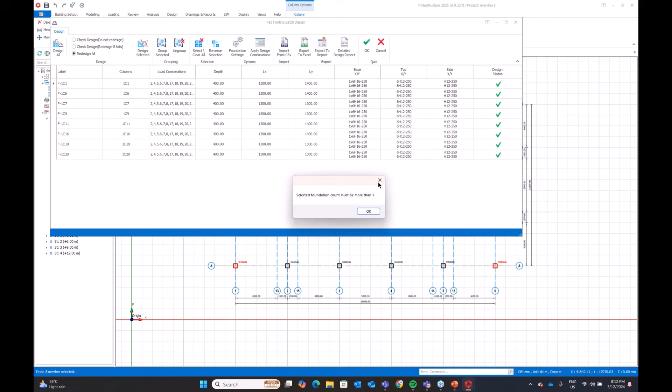Now these can be grouped. Let's have a look. Group selected. I haven't selected all of them. Sorry, you can rationalize these. You can group; I'll show it with the pile caps. If you hit OK, they get created.

Over here, if I just choose these perimeters here, for these elements, let me just grab that column, and this one down here, let's get that as well. That one, right click. So this time around, I'm going to insert pile caps. So in here, you'll define arrangements.

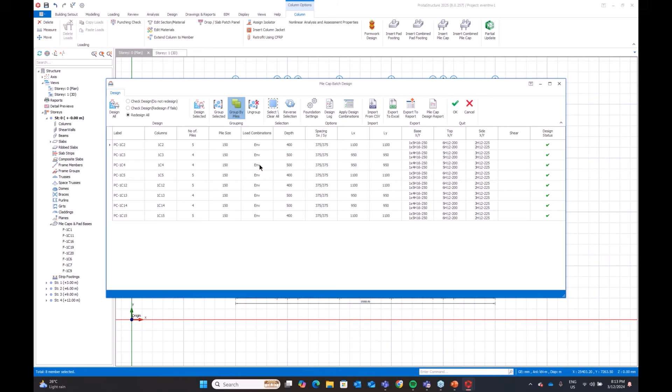In the foundation settings, you can define your allowable, maybe you've got an ultimate compression capacity. You could put your pile size and the spacing that you want, so you can just set this up. And then you can ask it to design them all. So this has been designed. Again, these can all be grouped, so it will find those that are similar, and they've been grouped here. And if you hit OK, you can see that your pile caps have been created.

Now, if you find on site that piles are not where they're meant to be, and you want to just come in and interrogate these, you can see the piles here, the pile locations. All of these are editable. So if you found that a pile moved, you can key in the eccentricities, and we will check to see whether that's okay or not.

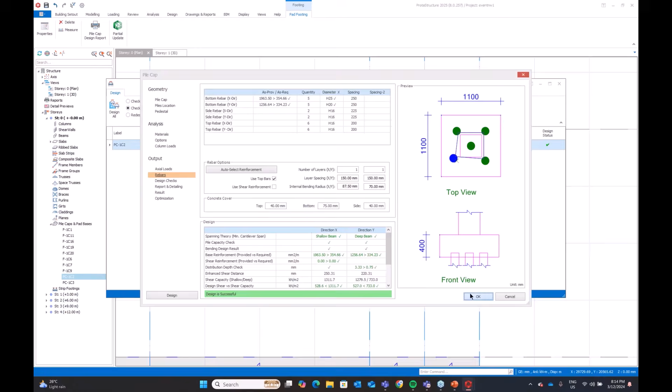You can see there that maybe I need to increase the steel. So you can come and manipulate this and work with this and try and get this to pass. You can just play with the arrangements here. Let me just up it a bit more and see. Yeah, so I've just tweaked that to make that work. And then maybe that's my as-built pile. So you can see the as-built pile position is now being presented.

Okay, so quickly we've done an interesting building, a little bit different from convention, but I just wanted to take the time to show you how you can employ and use these different structural systems in practice. At this point, the final thing I might want to do is create some of the documentation around this. So I'm going to load ProtaDetails, and I'm just going to save this. It will load up ProtaDetails, and we'll start to document out some of what we've created today. Just give this a second.

It will launch. Now, ProtaDetails is part of our documentation tools. It's a complete CAD system. You can happily draft in here. It's set up for structural detailing. When you launch ProtaDetails, you can just use the auto generate commands in here. I'm going to auto generate. Now it'll ask me what I want to draw. I can choose. I'm going to insert them to a sheet.

I can come and choose a title block. So this would be your standard title block. You can play with the scale, the details here. You can play with things like how you want the beams truncated in the sheets. All this is at your fingertips. And once you're happy with this, you can then just ask it to draw. So it's going to go away and take what we've created, and then it's going to place them into our drawing sheets.

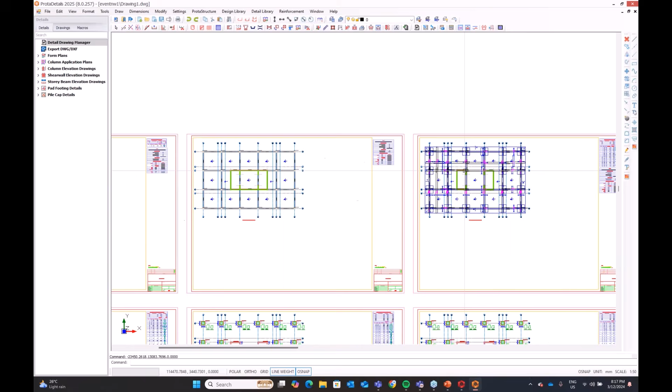This is our flat slab with the drop head detailing. You can see the composite systems here, number of studs and so on. You can have set out drawings against grid if you wish. You can also draw things in elevation. So here you can see I've got my core walls, and you can see the end zones being drawn out. You can have column elevations if you wish to provide those types of drawings.

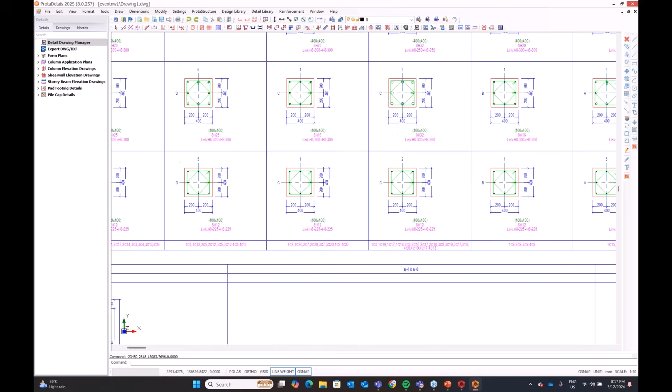Maybe you just want to provide schedules, so you can see the schedules here. We will automatically group similar columns for you. They'll be created, and so you can see all the grouping has been set up here, as well as the core walls. So you can see those being drawn. For the beams, they're also provided. Similar beams will be grouped, and you can see the grouping here.

If a beam gets too long, like in this situation here, we'll automatically truncate it. It'll carry on and continue to detail out. So you can see we've just neatly been able to arrange all these beams into this sheet. Now, if you look at this member here, for example, there's 3 H12s. It's positional mark 1. If we come over to the table here, you'll see that for positional mark 1, the 12s, there's actually 44 of those. They're 5.2 meters long,

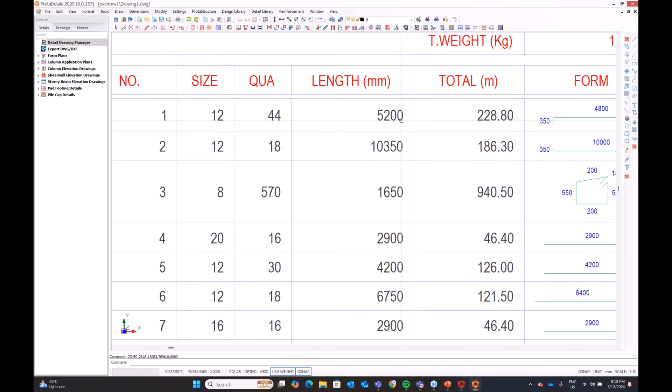228.8 meters in total. Here's the bar bending schedule. And you can see for this particular drawing, there's about 1.82 tons of steel. That includes everything, all the laps, the lengths, everything's been calculated in here. If you want to, with this release, you can actually just select those tables, and if you go to export, you can dump these out to Excel.

So maybe the client's asking you to do some quick estimates on a job, you can just put in some costs here and you could price that out. So that's a nice new feature that's come in. You can just export things to Excel with a click, and then you could provide some insight into the cost for the job. You can present these in a schedule form if you don't want to provide that level of detail. And again, you can see your foundation drawings here, your pile caps, as well as your pad footings. They're all being drawn up as well, and they're also being all fully quantified.

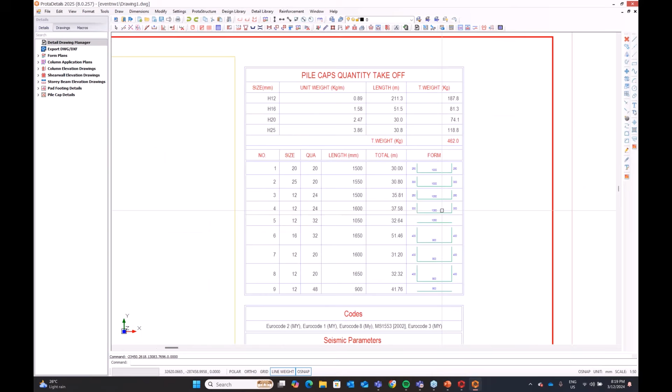As I mentioned, you are in a CAD platform. So if you wanted to tweak things, and maybe you didn't want that detail there, and you just wanted to pick it up and move it somewhere else in the sheet, you can. It's entirely up to you. You're in CAD. Maybe you wanted to bring this detail and provide it somewhere else. Forgive me, I'm not the best CAD technician in the world, but you get the idea. If you wanted to bring this in, you could.

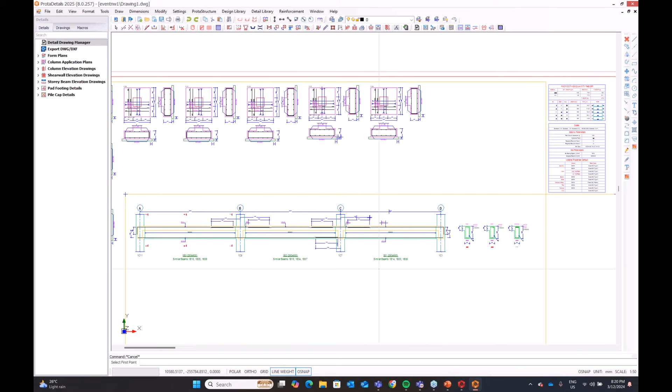If you want to do things like truncate a member, maybe you'd like to slice the member at some point and bring it down. Yeah, there's smart things going on in here. It knows what the size of the members are. The links have been repeated here. The member references have been repeated. So it's easy for you to understand what's changed. And there's just tools in here that can help you with the detailing.

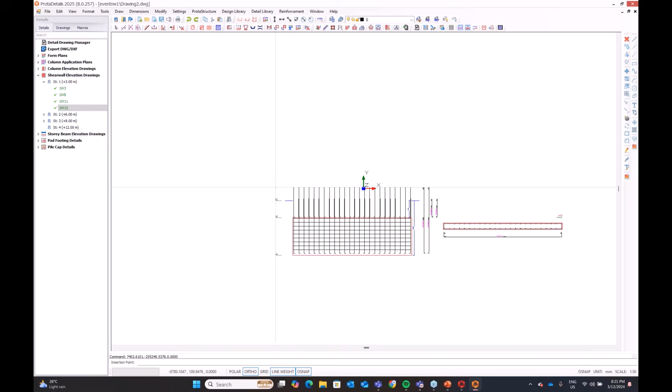So that gives you an idea about how ProtaDetails works with the documentation. There's an array of other tools in here that you can take advantage of. You can create new sheets, and you can just pull off certain information that you want. If you wanted to draw up, for example, a shear wall elevation all the way up the building... that's probably not the best one in the world to do. That was my short wall. Let's just see if we can draw a complete elevation of that main wall up. Okay.

You can see that core wall drawn all the way up the building. You have tools in here where you can grab what you'd like to draw, then place it into your sheets. You can arrange things as needed.

We have a library of design in here. If you want to design other things on the model project, you've got staircases, different types of stair arrangements you can design. We'll produce detailed design reports and create the documentation, so you can see the stair detail being produced.

There's an array of other calculations in here, things like retaining walls. You can come in and set these up, do things like sloping backfills, and design these with a click of a button. We'll do slip circle analysis and so on, with detailed documentation, and you can create the details with a click. You can explore these in here.

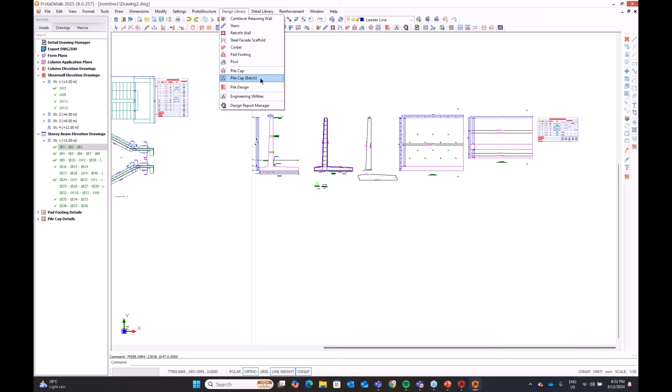We're increasing the number of components in here that you'll see as we move forward. This library will expand out, so if you just want to design things quickly, you have these available as well.

I know we've covered quite a bit of ground today, and I wanted to focus on some of the new capabilities with ProtaStructure 2025. I'm not going to dive into ProtaSteel today—there are a lot of other videos on our YouTube channel that go through that in detail, showing the real power of automated connection design and steelwork detailing.

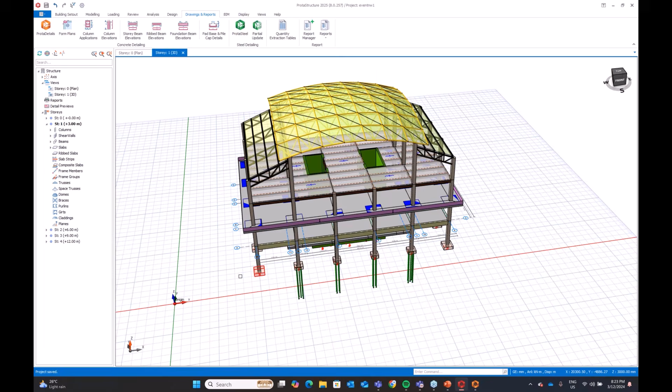I just wanted to stop at this point, and I hope you found what we've covered today informative and interesting—engaging and employing the new capabilities of the system, showing you how you might take advantage of this on your particular jobs. I know this is a bit of a unique building, but I wanted to give you some insight here.